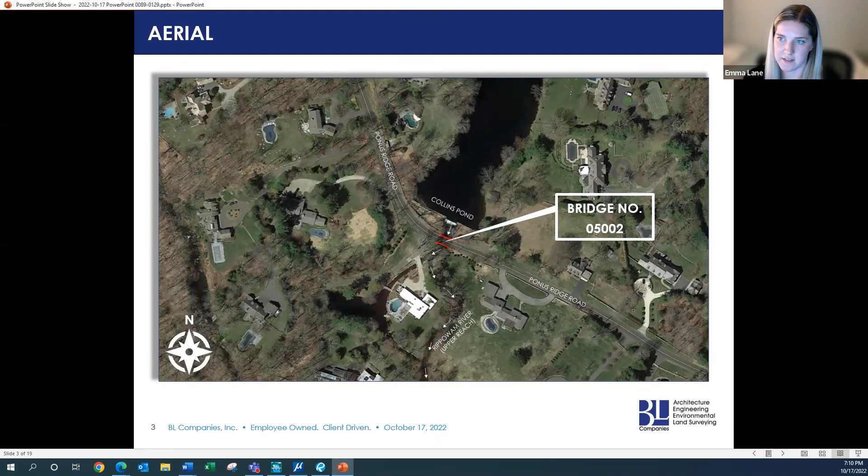Just upstream of the bridge, there's a stone masonry dam at the south end of Collins Pond that conveys water over a spillway and under the bridge. Just downstream of the bridge, the channel branches into two directions around a small island with a residential home.

The site is located within a FEMA floodplain and floodway. The bridge consists of a single span structure, constructed in 1957 with an ADT of 1,560 vehicles. It consists of a reinforced concrete slab superstructure supported by reinforced concrete abutments with flared wing walls. The drainage area to the site is approximately 5.2 square miles.

The existing bridge is classified as an intermediate structure and is hydraulically inadequate since it does not provide the required 1 foot of underclearance or 1 foot of freeboard. The 100-year design storm elevation is under pressure flow and provides 0.8 feet of freeboard to the roadway low point.

The bridge itself is functionally obsolete with an overall evaluation of 3, which means it's in poor condition due to the deck geometry, which has no shoulders.

Ponus Ridge Road is posted with a weight restriction due to the strength of the superstructure, which prevents some of the town's fire vehicles from using the bridge.

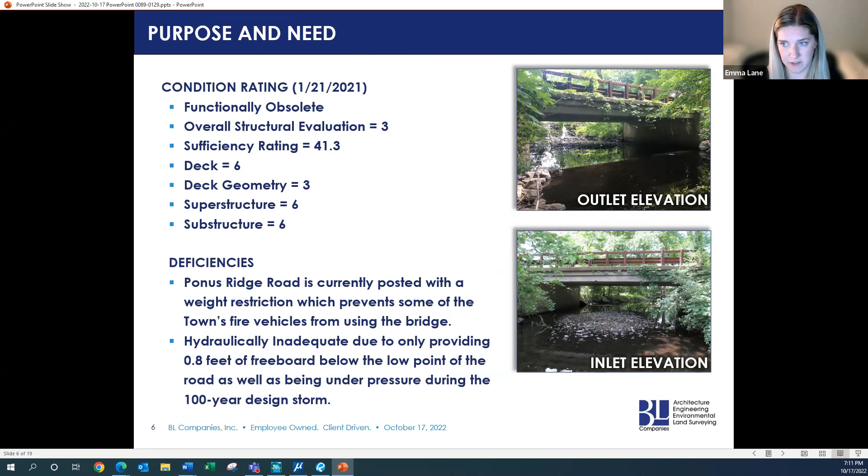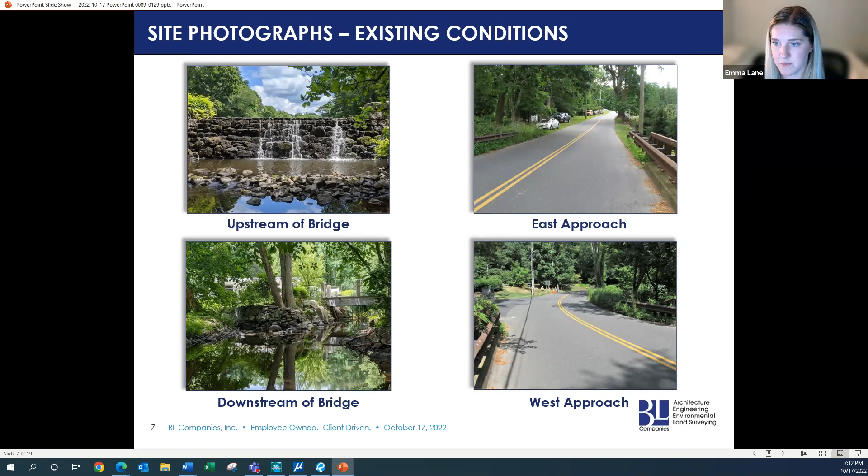The proposed work will replace the superstructure, and there will be minimal roadway work. The horizontal alignment will be maintained, and there'll be a minor raise to the vertical alignment of 0.03 feet. There will be no work within the wetlands or the watercourse.

There will be slight modifications to the existing abutment seats to accept the new superstructure, and the proposed bridge will remain hydraulically inadequate, and the low chords will be maintained.

The bankfull width of the channel is 40 feet, and the channel is lined with cobbles, and the embankments are horizontally and vertically stable.

The curb to curb width will increase to accommodate two 10-foot travel lanes with shoulders.

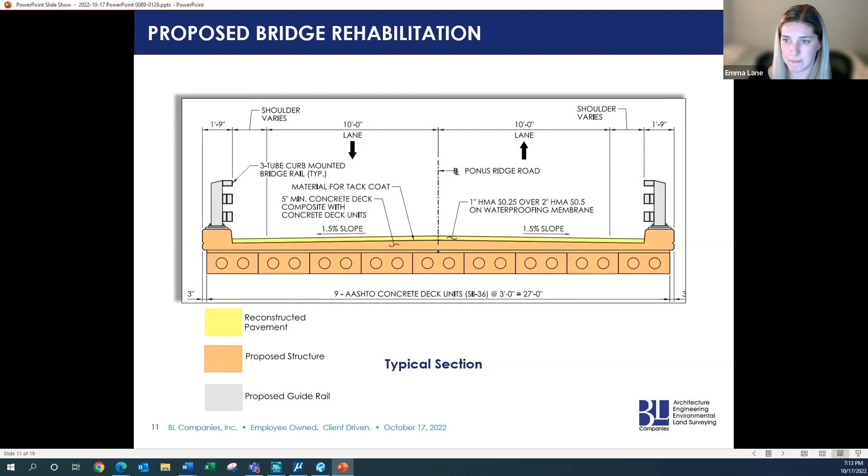There are minor decreases in the water surface elevation upstream of the bridge, but there are no changes downstream. The low chords will remain the same, and the roadway low point will be slightly raised.

The proposed bridge will remain hydraulically inadequate with pressure flow during the 100-year design event and 0.8 feet of freeboard, which matches the existing condition.

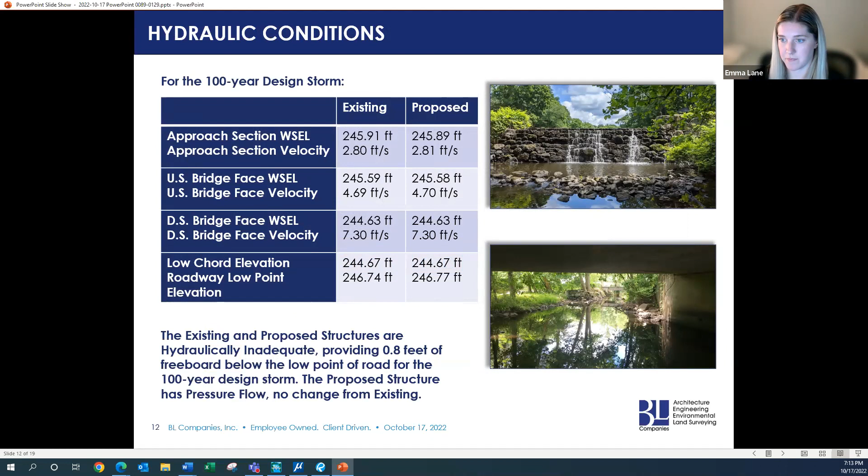There are no wetland or watercourse impacts within the proposed work area, and the total impacts of the upland area is around 4,000 square feet.

Minimal inland wetlands and watercourse impacts are anticipated due to the lack of substructure work. The debris shield will be installed above the 2-year storm elevation and will be removed prior to any large storm events. A debris boom will be installed downstream of the bridge.

Required permits include the Town of New Canaan Inland Wetland Permit, the Army Corps Self-Verification Notification, the DOT Flood Management General Certification, and the Town of New Canaan Floodplain Management Permit.

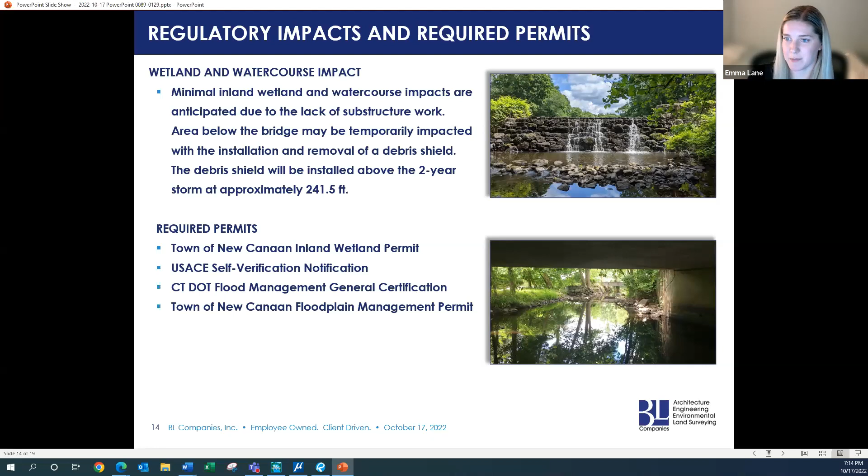As noted earlier, the bridge is located within a FEMA floodplain and floodway. There are no changes to the water surface elevation or the velocity within the 10 and 100-year floodplain or floodway.

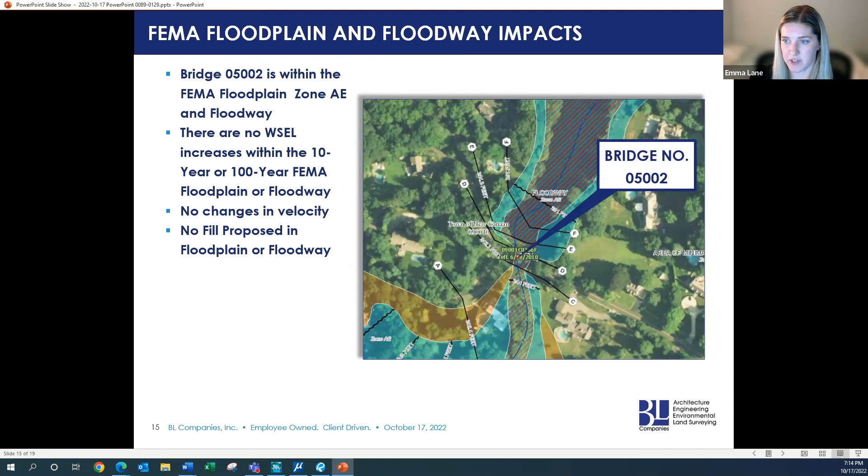DEEP Fisheries reviewed the project in May 2020 and found that a replacement will have minimal impact on fisheries resources. They also noted that any unconfined in-stream work within the watercourse will be restricted between the period from June 1st to September 30th.

According to the June 2022 NDDB map, the project is not located within an area of state and federal listed species concern, and consultation will be completed with the U.S. Fish and Wildlife Services for the northern long-eared bat.

The project is anticipated to be completed in 2023, and the project construction cost will be $840,000, funded with 80% federal and 20% state funds.

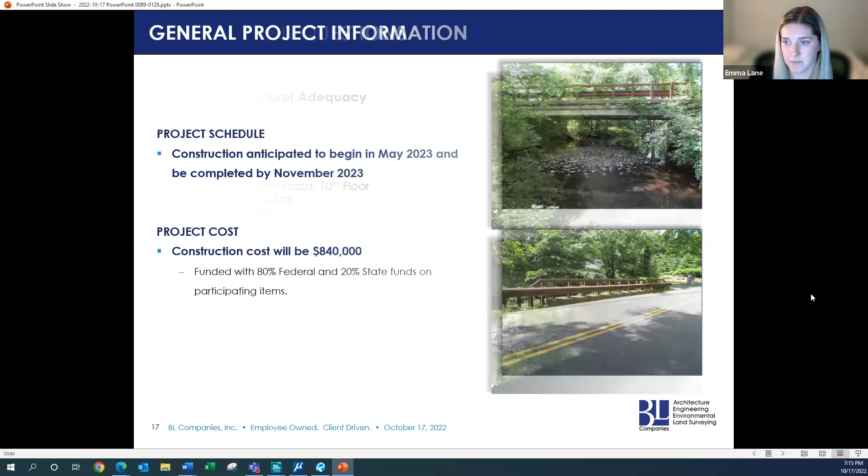The design goal of the project is to restore structural adequacy.

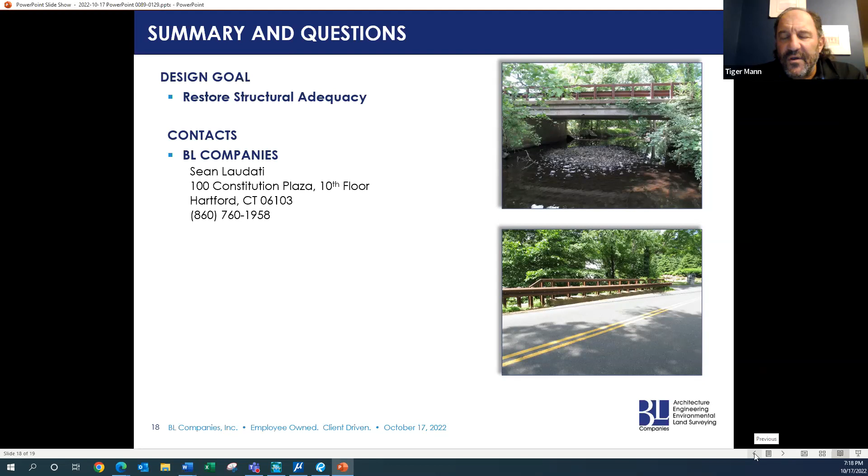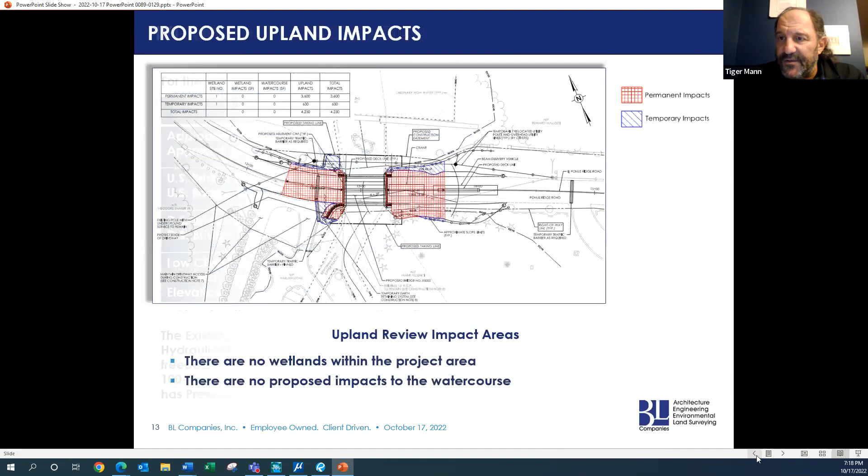You're talking about the detour itself? Yeah, we had studied that. I don't have that information off the top of my head. I didn't understand that it might be a question here, because in our minds the decision as to whether or not to do the bridge has already been passed. But we had worked with the fire department on their routes, where certain apparatus can travel and certain can't. Given where we are, the detour is quite extensive to get around. It would be the same detour as in construction, where you'd turn right onto Greenlee Road, then left on the road over there, then back onto Daniel Road.

No, I see that. So another question - I think you said the new structure will remain hydraulically inadequate. Is that correct? Yes, that's correct. There won't be many changes to the hydraulic adequacy. Okay, was that something that was considered?

Yeah, so typically for these types of projects, it starts off in a rehabilitation study report. As part of that, we reviewed replacements and alternative options. In order to create a hydraulically adequate bridge, it would create large impacts to the surrounding properties. This bridge is right next to two adjacent driveways, which hinders what we could do without greatly impacting those properties. So that was all in consideration, and part of the reason why this option was selected.

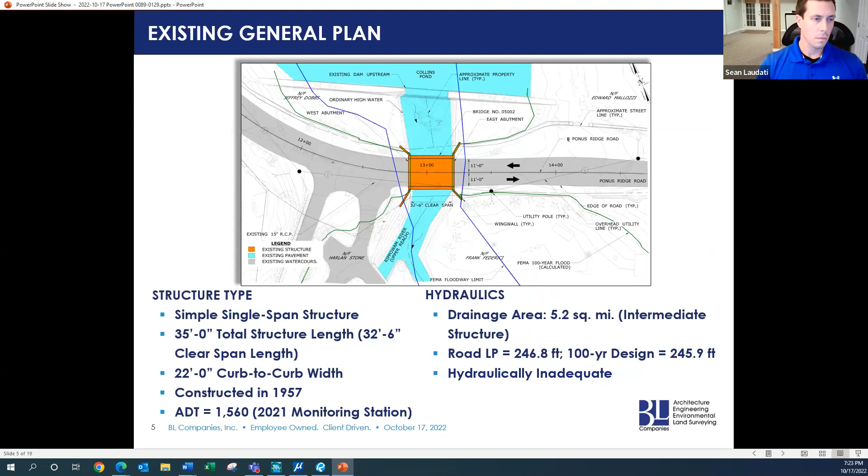So what did you say, the 13 tons is the maximum weight the new bridge can handle? No, that's for the old bridge. The new bridge will be designed so it can pass all rated vehicles. I was listing the ratings of the existing bridge. Emma, if you go to slide 8, it has a picture of the weight limits — in the upper left corner, that's the current weight restriction. The new bridge will allow all vehicles to pass.

This is Beth Sanford. What is the expected lifespan of the updated bridge? It would be designed for a 75-year lifespan. The existing superstructure is rated a 6, which for DOT is considered right below good. But with the repairs we're doing above the water, that would bring it back up to a 7, which would anticipate the 75-year lifespan.

Sean and Tiger, just a quick question. Basically what we're saying is we're not changing the look of the bridge, the structure, or raising it — we're doing the bridge exactly the way it looks now, except it can handle more weight and our fire apparatuses, correct?

The appearance of the bridge will be slightly different. Right now what you're seeing is a non-MASH compliant bridge rail, and since this will be a new bridge, we have to meet the new standards. The bridge will have a 3-tube bridge rail curb mounted, and on one end, near the mailbox, there won't be guide rail since there isn't space for it plus the end treatment. Instead that end will have a curved barrier wall that curves outside the clear zone. The other three corners will have end blocks and steel-backed timber guide rail.

So it's actually going to look nicer — right now you're seeing basically a concrete barrier, but it'll be a nicer rounded concrete barrier instead of the guide rails, and it's also stone faced, stone cladded. If you've looked at Hickok or Mariomi, specifically Hickok, you'd see exactly what we're trying to match — stone cladded, upgraded railing, and the guide rail similar to the Merritt Parkway with steel backing. We don't do galvanized or Cor-Ten anymore; we wanted to upgrade to the Merritt Parkway rail. So what you see here is the nicer profile, which is almost the standard we've been going to for almost all of our bridges.

This is George Perkins for the record. Just a quick overview on how you're going to route the traffic around during construction. It will be closed during construction and detoured, following a similar detour to the current load restriction detour. Let me just pull up the map quick.

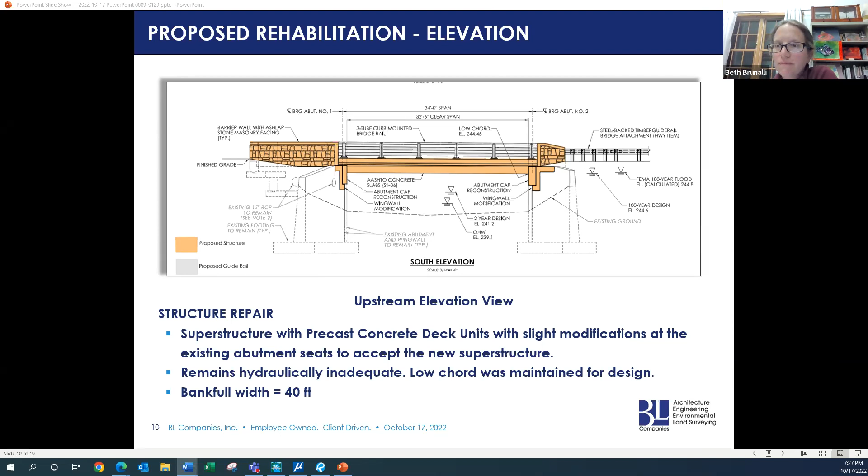Sorry, one second. Any other questions, comments? I have one question — could you bring up that weight limit sign? Oh, go ahead, go ahead.

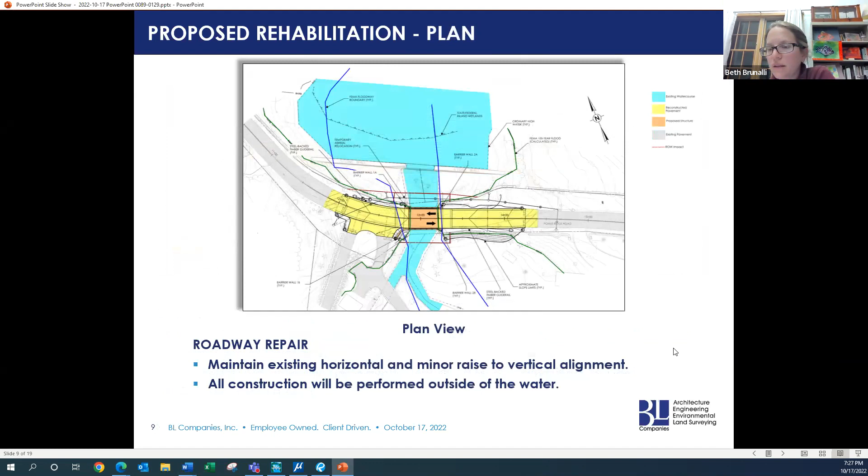This is Commissioner Brunalli, I just had one question. I appreciate that this design will make a significant public safety improvement by allowing fire vehicles to pass over it, and there are a lot of competing considerations. My question is, 75 years is a long span of time — how confident are we that the hydraulic adequacy of the current and new design will be the right decision going forward for 75 years?

I'm not really sure how to answer that, but I can't predict which way we're going. So we are designing it to what is required from the department standpoint, and that's kind of how we are where we are. The 100-year design storm can increase in the future as storms are changing, but we can't necessarily predict that at this time.

This bridge is 80% funded by the federal government through their program run through the state of Connecticut, so we're adhering to both the state and federal requirements. These are not guidelines set by the town, these are guidelines set by the federal government telling us. Based upon the analysis that was done, the choices that were made were also determined by the DOT and by FHWA. So we didn't make this in a silo, so to speak. All these decisions were actually made at a higher level than us, saying this is the way they feel the bridge should go.

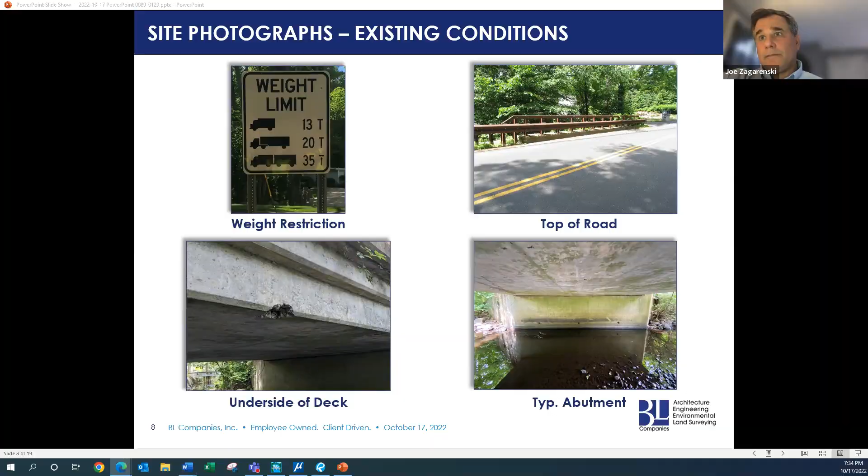All right, application number 22-23-10, 677 South Avenue, Waveny Park. Waveny Park Conservancy is proposing to install multiple shrubs and ferns along both sides of the entry driveway to Waveny Park. Some of the landscaping activities are proposed in and near field located wetlands.

Tiger Mann, Director of Public Works: Thank you very much. I was just going to share my screen to give you an overview of where we are. This is a partnership with the Conservancy. The Conservancy went out and hired Kathryn Herman Design to propose a master plan for Waveny Park, specifically the area south of the Waveny Drive.

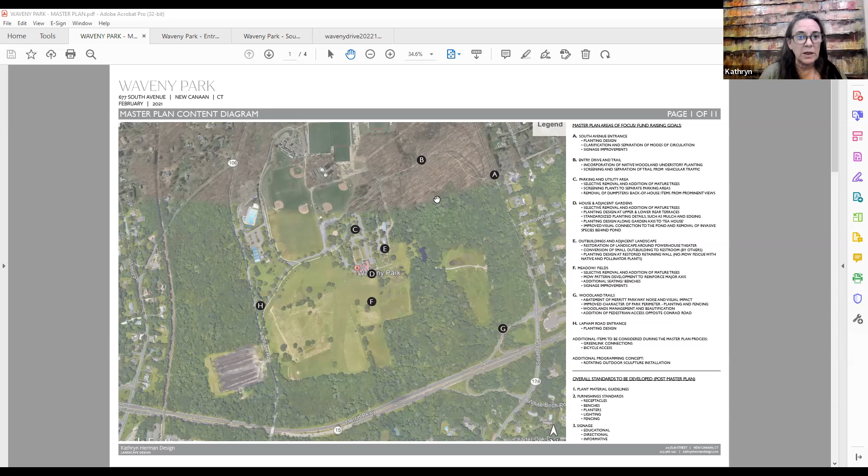Tiger just spoke about us addressing the entrance both on South Avenue as well as the Lapham Road entrance. The idea would be to use native plant material to really simplify and codify what's being planted there. At the south entrance, on the inside, if you're turning in off of South Avenue, backing those wing walls would be rhododendron maximum as well as viburnum dentatum, the blue muffin.

What would be on the inside that you see as you turn in would be the ferns, the autumn fern. So you can see, as Maggie's showing, the backing of the Maxi rhodes as well as the viburnum, and then on the inside it's just all ferns. Very, very simplified - this is meant to be a very native palette of plant material.

As we go up the driveway, let's talk broadly about what the palette is. It's a mix of rhododendron - different types including rhododendron vaseyi, rhododendron mucronulatum, rhododendron periclymenoides, rhododendron prunifolium, rhododendron schlippenbachii, and rhododendron viscosum. It's a real mix, and for the most part these are native - I think there are only two that are not native rhododendron.

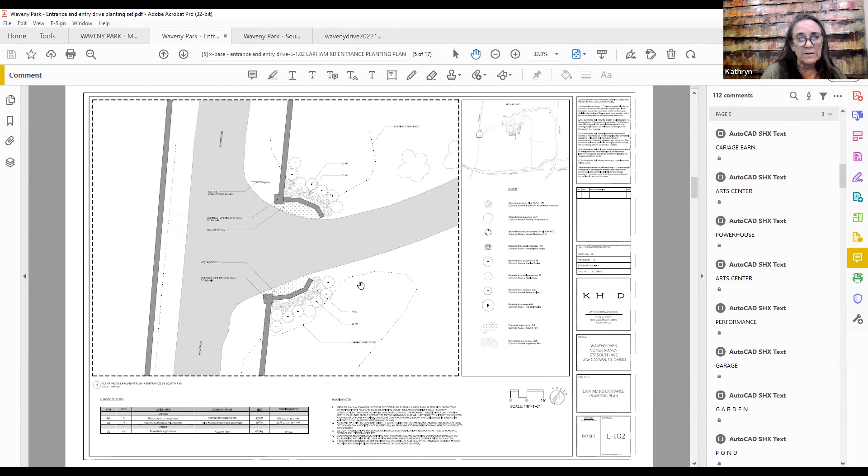And then we're essentially repeating the same planting on Lapham, on the backside. What Maggie's flipping through is all the segments - the planting for all the segments along the driveway - so you can see how those plantings are done with the drifts of the ferns planted underneath all the shrubs.

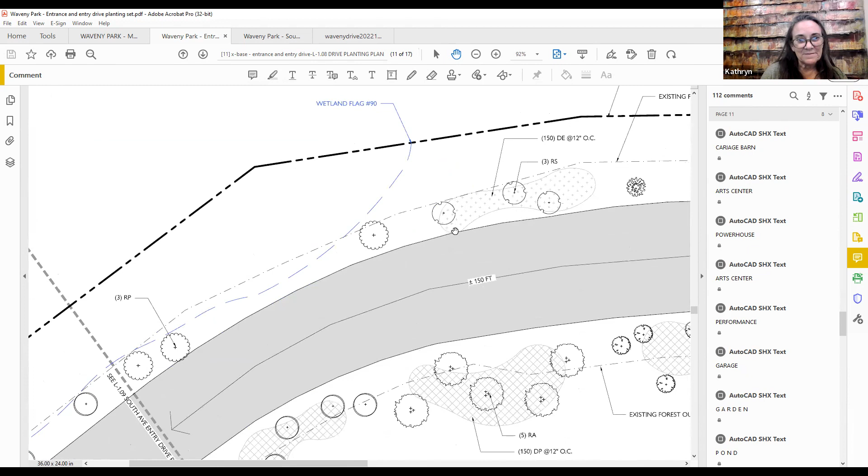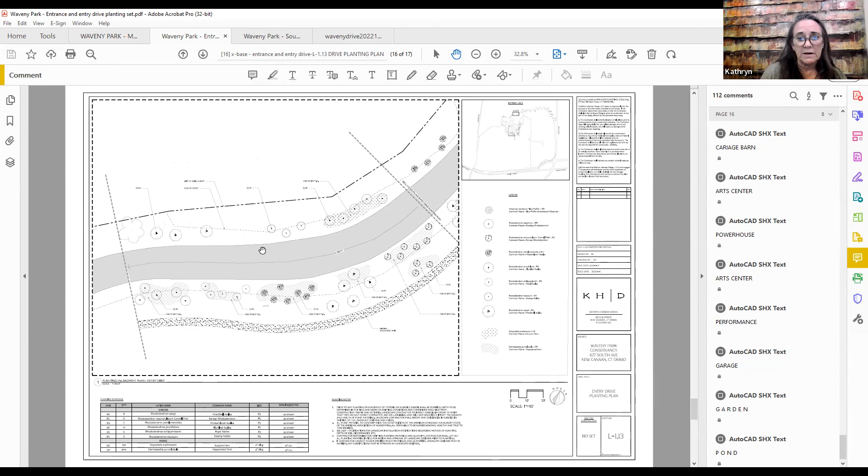I'm looking to stay out of the wetland. These are each segments coming up that driveway, so we're not disturbing any of the existing trees that line the roadway. The idea is to take advantage of the openings that exist there along that driveway, to really just fill it in and add some interest, color, scent, and fall color.

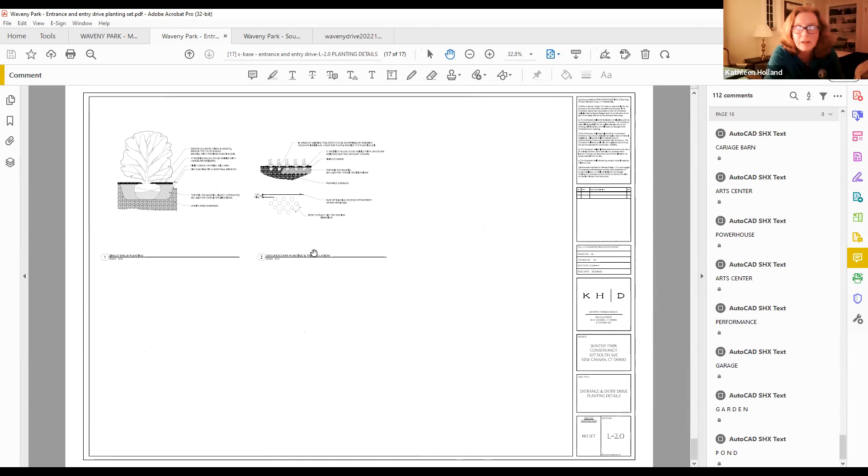Kathleen Holland asked about timing - are you hoping to do the fall planting now? Yes, we went out to bid and received several bids. Now we're working through each contractor, making sure the plant material is available and what their expected time frame would be. The majority of the plant material is available, and they will be looking at starting within the next three weeks. Obviously it's got to go to the Board of Selectmen for approval, and then once that happens they would come out and take care of the work. It should be noted that it's somewhere on the order of close to 10,000 ferns looking to be planted, and a couple hundred plants themselves.

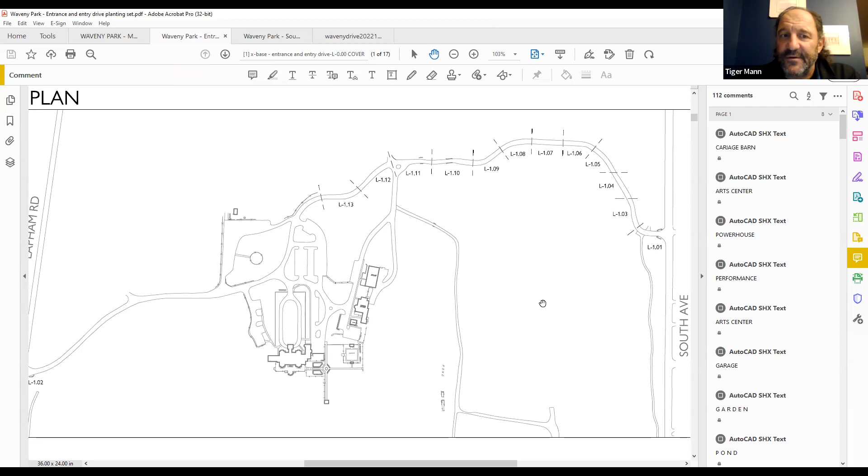So it's quite an extensive plan. The Conservancy's done a very nice job - Kathryn and Maggie have done a really nice job on this plan, and we think it'll be a very nice enhancement to the entrance drive coming in off of South Avenue. Thank you, Tiger. What's up on the screen shows the quantities with the ferns and rhododendron that Tiger just mentioned. This is George Perkins, for the record.

What about invasive plants? Is there a plan to take care of those? This plan, honestly, is just addressing planting new plants, but I was thinking along the way. Personally, what I have observed is that there tend to be more invasives along the trails as you go into the woods. Along that driveway, from what I have observed, there's not a lot of invasive plant material, but I suppose if we came across it, it could be removed.

This is Angela Jameson. Will all this work, the plantings, be done by hand, or are you going to employ some equipment? I would imagine they're doing it by hand, hand digging. These aren't terribly large shrubs - you can see the sizing we've got there. I think maybe the largest is like a number 5, which is a 5-gallon, so mostly 3 gallons, 5 gallons, and then there would be some ball and burlap at 4 to 5 feet in height, or 3 to 4 feet. Because they're scattered, it's really handwork, hand digging.

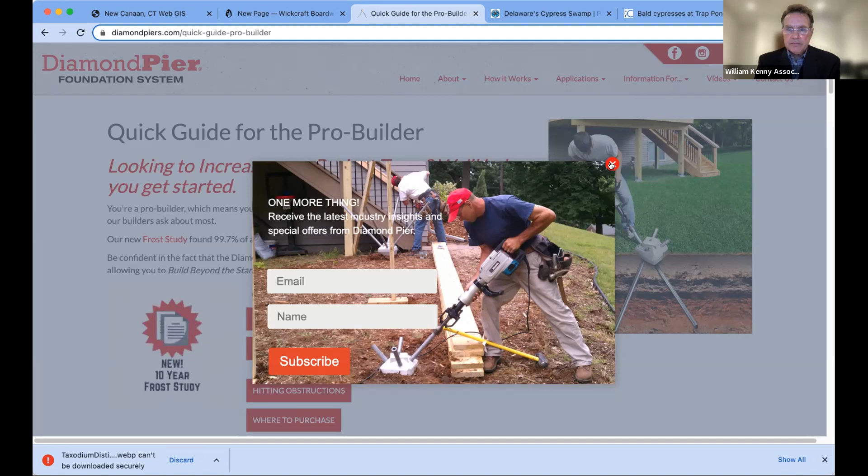As discussed, we're proposing to use these diamond piers, which have a very small footprint, approximately a 1 foot square structure. Rods are drilled into the ground in 4 different directions to hold that foundation in place, and then the legs of the steel boardwalk structure sit right on top of that pier. For this boardwalk, it's under 450 square feet of total footprint, and the structure will be elevated about 2 feet above the wetland surface.

This is Angela Jameson. What kind of equipment will you need to use to install the boardwalk? It'll be done by hand and with small vehicles that drive on the boardwalk itself. The farm owns small electric vehicles they use to maintain their property, and they're sized to cross the boardwalk. That's part of the reason to provide them access to the eastern portion of their property.

If I go back to our map, you'll see there's a fairly large upland area here that they don't currently have access to. With this boardwalk, they'll be able to access it and maintain and enjoy that part of their property.

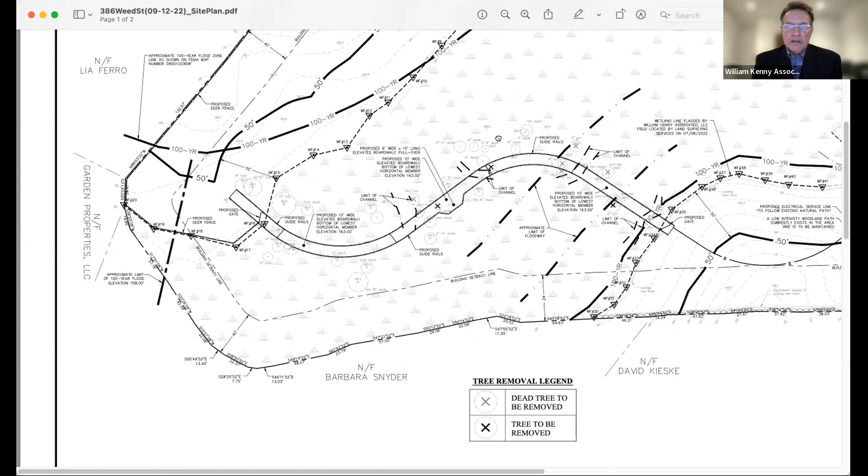This is Beth Sanford. I'm just curious where the sugar maples are that you're gonna take down. Oh, the red maples - swamp maples. Let me bring up another image here. This is the drawing prepared by Jim's office, provided to you with the submission. Where you see a black X, those are the two red maples to be removed. And where the gray X's are, those are the ash trees.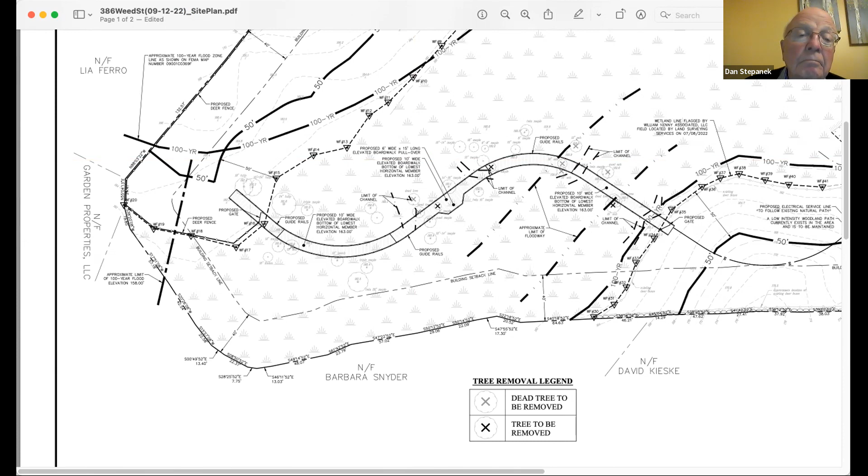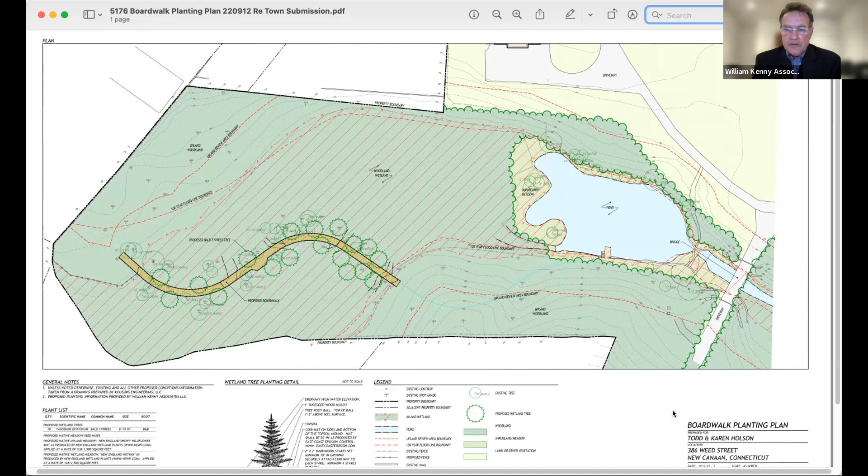I'm just curious, in terms of installing the boardwalk, is the number one objective a recreational one, or is it more for maintenance access? Or is it hard to answer that question? It's equal - they're both very important. And the maintenance that you anticipate the owners will be doing in that area will involve what? It's very similar to what you see in the photos earlier - just to maintain the woodland, it's a light touch. Okay, thanks.

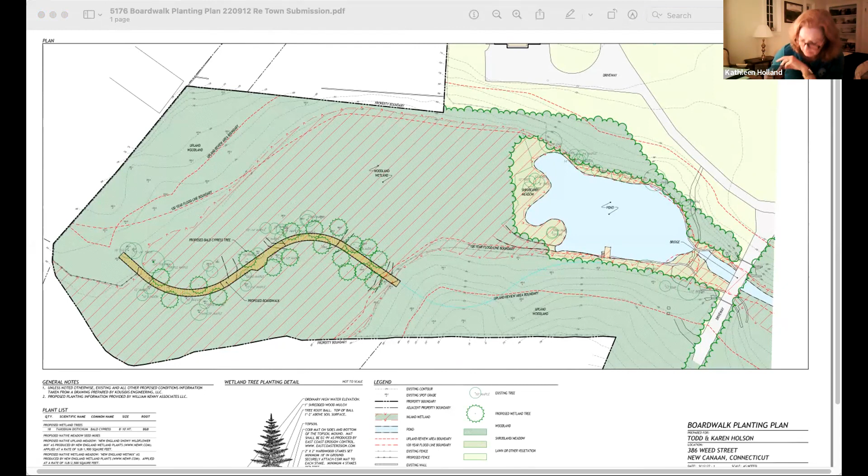Any other questions? I just have an overall comment, Kathleen Holland for the record. I think it's really important to note what Bill had mentioned - for a project of this size, a fairly significant boardwalk crossing the wetlands, the overall impact is 450 square feet, roughly 20 by 20, a little more than that. That's pretty impressive. As I said in my staff report, through their engineering techniques and Bill's advice, they've devised a good plan with multiple installation considerations and construction techniques that will limit the impact to the resource we're trying to protect, while still giving the owner access to this unique area of the property and the ability to maintain it. The only special condition would be an as-built upon completion of construction activities to update their current survey to add this infrastructure to the plan.

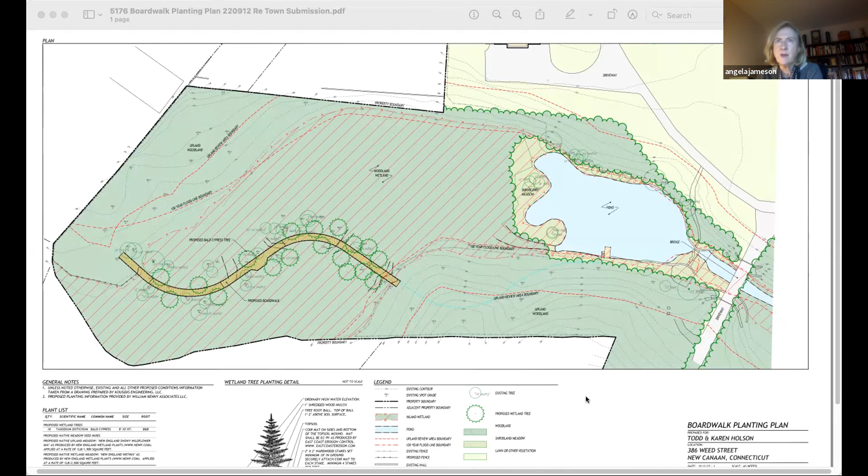So I think this is a well thought out plan, carefully put together. It sounds as though it won't have a huge impact on the wetlands, and I would like to move approval of the application, subject to the special condition that the survey be updated on completion of the project.

I'll second it. I think the chairman is on mute. Dan, you have to unmute yourself. Can you hear me? Yes. Wow, I've been trying to ask some questions. Anyway, I'm in favor of this - I think it's a very good plan, just like George said. You've already made a motion, and who seconded it? George, you second it? George is muted now.

Angela made the motion and George seconded it, with a special condition that an as-built be required upon completion of the construction activities. All those in favor, raise your hand. Anyone opposed? Motion's carried. Thank you very much. Appreciate it.